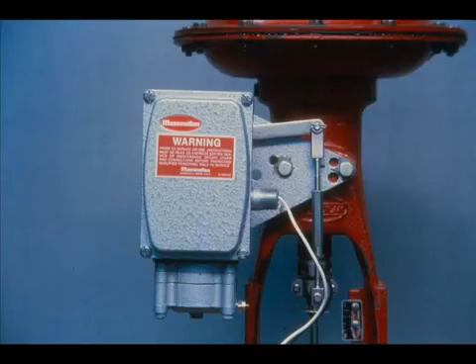The Masoneilan Model 8012 is an electro-pneumatic valve positioner. It provides an accurate means of obtaining a valve stem position proportional to a 4 to 20 milliamp DC input signal.

Besides the 4 to 20 milliamp input range, it is also available for input ranges of 10 to 50 milliamps and 1 to 5 milliamps.

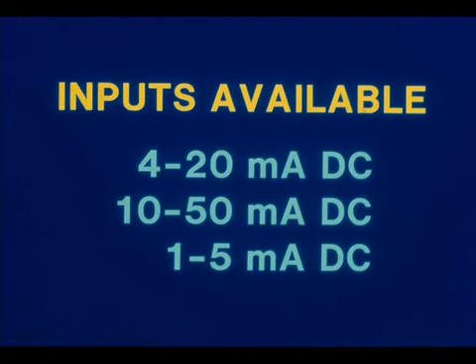The current input produces a pneumatic output which positions the valve stem. The positioner is a force balance electro-pneumatic device that may have either direct or reverse action and provides a convenient means of split ranging the controller output signal.

The basic 8012 positioner is used with either direct or reverse-acting spring-opposed diaphragm actuators.

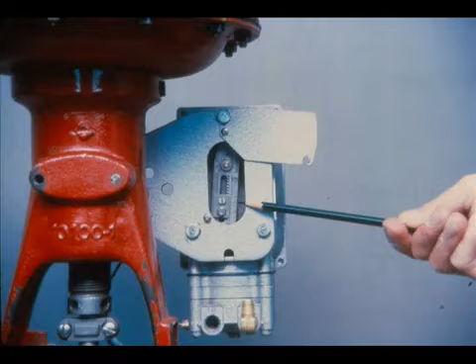A stroke adjustment in the back of the case allows for valve stem travel from 3/8 of an inch to 4 inches.

Other models are available for specific valves. These positioners utilize a cam feedback mechanism which provides for different control characteristics, such as linear and percentage control. In the case of the CamFlex 2 and the Sigma F, the cam also provides for split range control. The cam feedback mechanism replaces the stroke adjustment lever on these models.

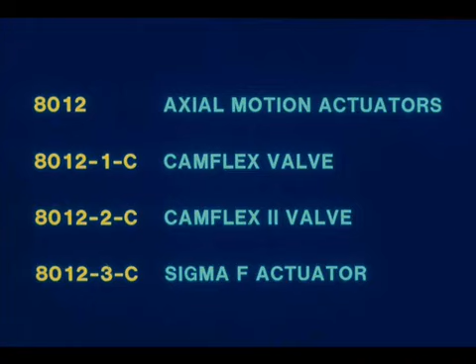For a direct acting positioner, an increase in the input current causes an increase in the output pneumatic signal to the actuator.

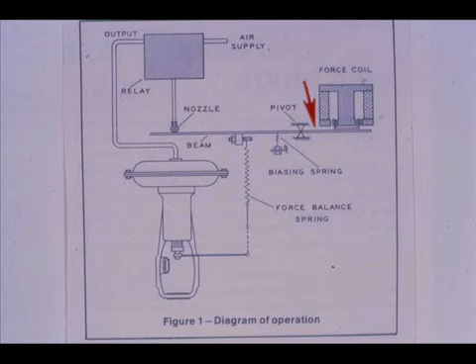From this schematic, we see as the current increases to the force coil, the right end of the beam moves down. The left end of the beam moves up toward the nozzle.

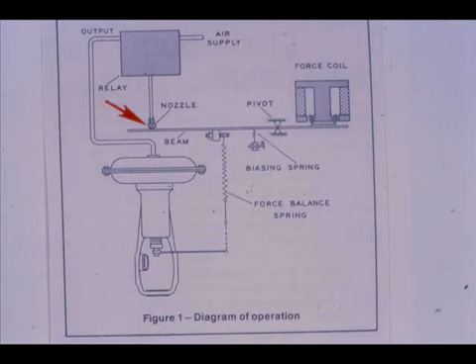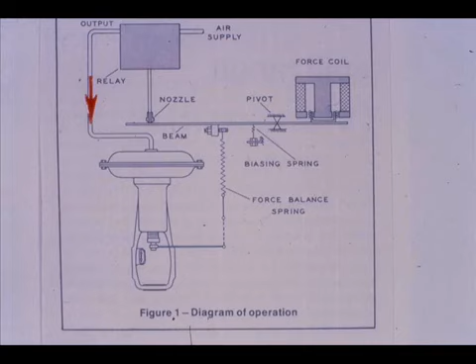As the flapper covers the nozzle, the relay output starts increasing. The increasing air pressure to the actuator moves the stem down on this direct-acting actuator.

The resultant valve stem movement is transmitted to the force balance spring, extending the spring until the force exerted on the beam balances the opposing force of the coil.

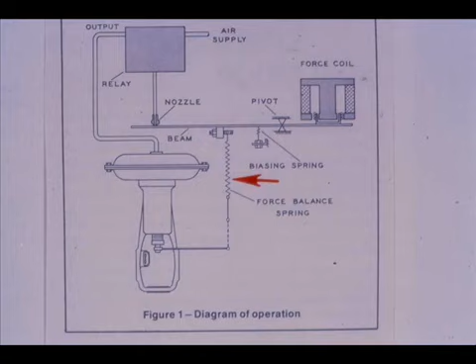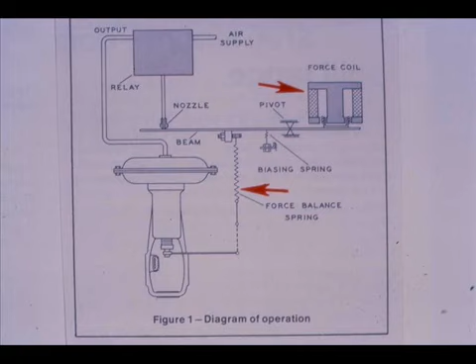As the two forces equalize, the nozzle back pressure decreases. The system then is in equilibrium, and the positioner output is stabilized at an amount necessary to maintain the desired control valve plug position.

Here are the actual parts: the force coil, the force balance spring, the beam and flapper, the nozzle, and the relay.

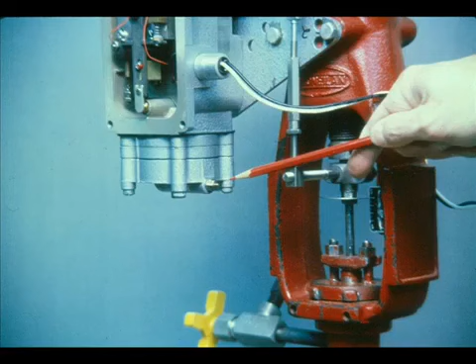The metering tube, or orifice for the nozzle air supply, is furnished with a clean-out plunger which forces a small wire through the orifice.

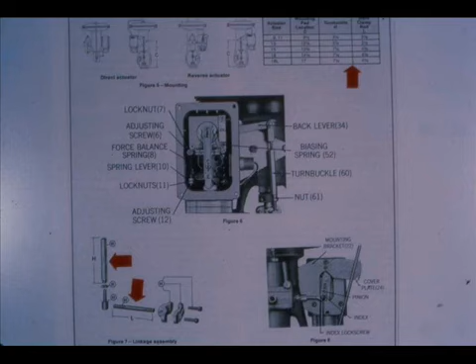Connect a regulated air supply to the 1/4-inch connection on the relay marked In. Connect the valve actuator to the 1/4-inch connection on the relay marked Out.

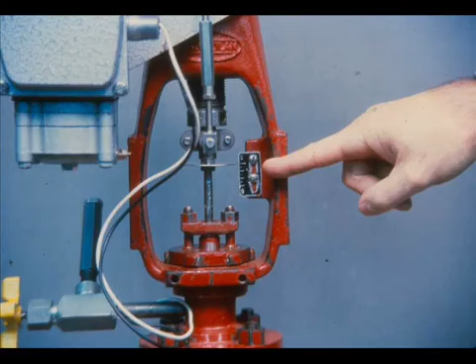To calibrate the positioner, the valve travel must be known. Loosen the index lock screw and rotate the pinion until the stroke index is opposite the marking on the stroke scale corresponding to the rated stroke of the valve.

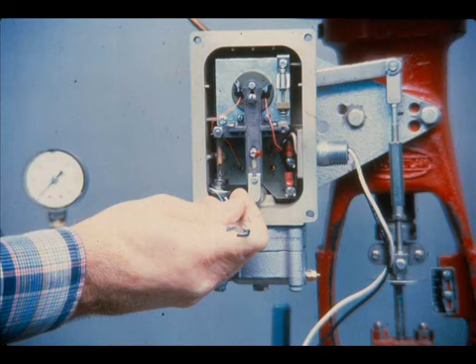With no pressure on the actuator, adjust the screw on the spring lever until at the short end of its stroke, the force balance spring will have a slight tension.

Tighten the nuts on the tension adjustment.

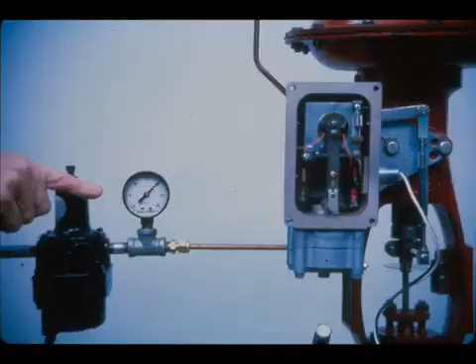Turn on the air and set the air supply regulator for 20 psi for a 3 to 15 psi actuator. Adjust the input current for midpoint of the positioner input signal range, 12 milliamps for the 4 to 20 milliamp range.

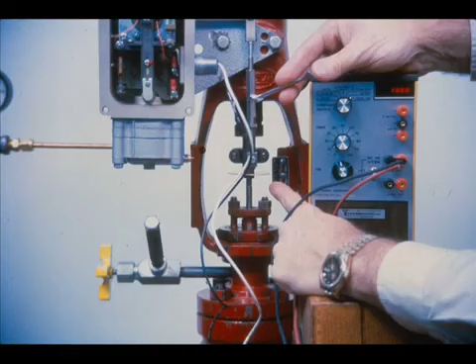Adjust the biasing spring until the back lever is perpendicular to the side of the case. Rotate the turnbuckle until the valve is at mid-stroke and recheck the position of the back lever. Continue to make biasing spring and turnbuckle adjustments until the back lever is perpendicular to the side of the case and the valve stroke is at mid-travel.

Set the current for minimum input signal range, 4 milliamps in this case, and observe the valve position as indicated on the valve travel plate. Change the current to maximum input signal, 20 milliamps, and check the valve stem travel.

If the valve stem travel is more than the rated stroke, loosen the adjusting screw lock nut and turn the force balance spring adjustment screw clockwise. If the valve stem travel is less than the rated stroke, turn the adjustment screw counterclockwise until the valve stroke matches signal span.

Tighten the adjustment screw lock nut. Set the input to 12 milliamps again and check to make certain the back lever is still perpendicular to the case and the valve is at mid-travel. If they are not, make the biasing spring and turnbuckle adjustments again.

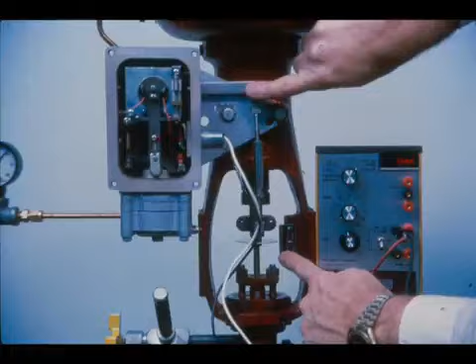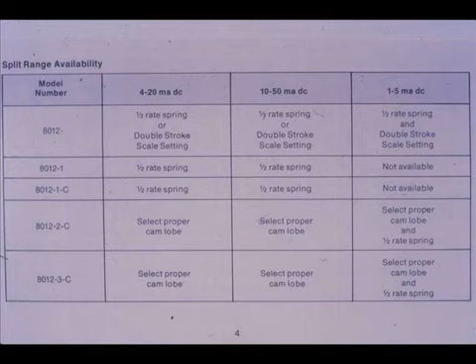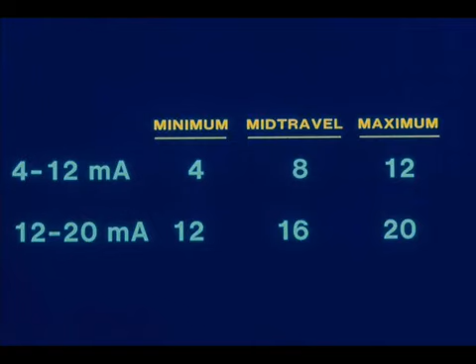Split ranging the positioner is a similar procedure, except the stroke index is set to twice the valve travel, or a 1/2 standard rate force balance spring is used. And the minimum, mid-travel, and maximum current inputs would be different for the split-ranged positioner. Reversing the positioner action is accomplished by switching the position of the instrument signal leads and recalibrating the positioner.

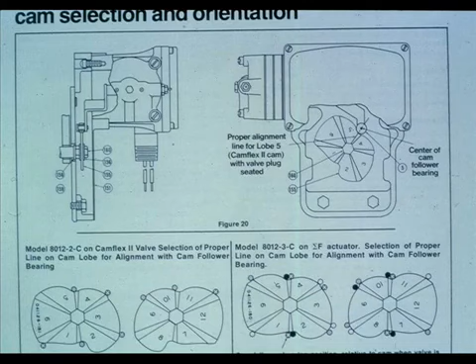If the positioner is on a Camflex II or Sigma F actuator, be sure the proper cam lobe is being used. Determine if the trouble is pneumatic or electrical.

To check the operation of the pneumatic circuit, pull the flapper away from the nozzle and the output should go to about 0 psi. This should cause the valve to go to minimum stroke. Exert sufficient force on the flapper to cover the nozzle. The output should be near the supply pressure and the valve stem should travel its full stroke. If the response is other than this, a pneumatic problem exists.

Push the clean-out plunger of the metering orifice to be sure the orifice is not plugged. Check to see if the metering orifice body is properly seated in the relay. Check for a plugged nozzle.

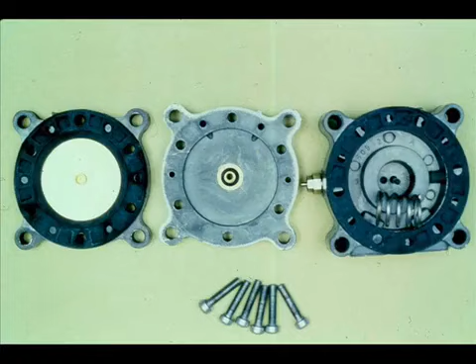To remove the nozzle, remove the flapper, unscrew the nozzle and clean it with solvent and clean dry air. If difficulty still persists, replace the relay with a known good one, or disassemble and clean the relay.

If the pneumatic section is functioning properly, the electrical section can be checked with an ohm meter. Disconnect the controller leads from the positioner and connect the ohm meter to the positioner. The resistance for the 4 to 20 milliamp positioner should be approximately 173 ohms.

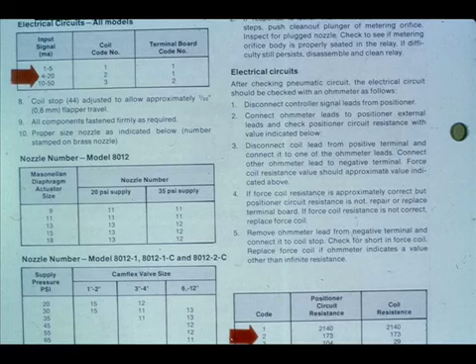If the resistance is not approximately correct, the trouble could be the terminal board or the force coil. To determine which is the trouble, disconnect the positive coil lead from the terminal board and measure the resistance of the coil.

The resistance of the coil to the coil stop screw should also be measured. Replace the force coil if this reading indicates a value other than infinite resistance. Refer to the instruction manual for terminal board and coil replacement. Coil replacement requires special alignment rods to center the coil and align the beam.